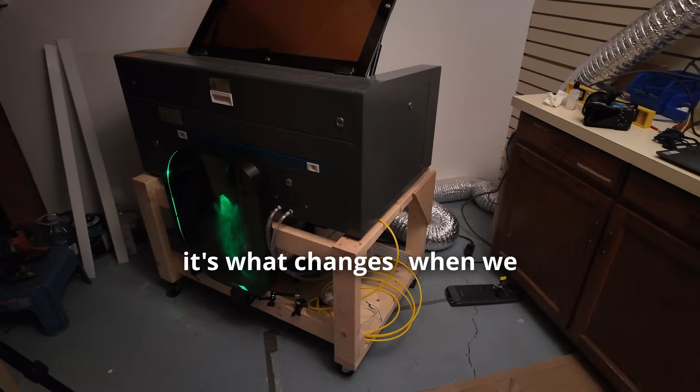All these shenanigans started when I wanted to gain back a few inches here, because this just feels like a waste of space. I wanted something that was easy to swap in and out, maintained the same performance as the existing tube, and protruded less than 2 inches from the back of the machine.

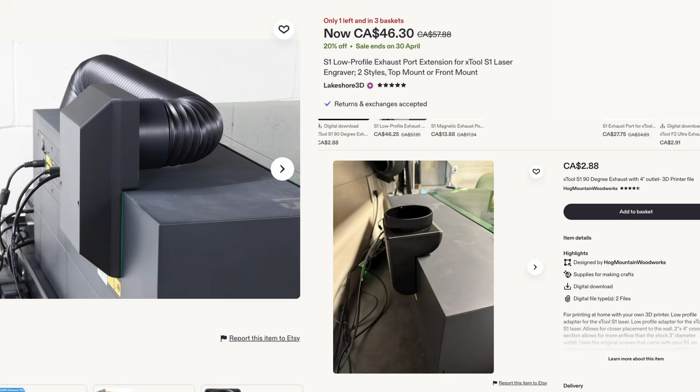There's a couple listings on Etsy for these low-profile port extensions, but they're built for a 3-inch tube. My exhaust port is 6 inches, so to maintain the airflow, I think we're going to need something a bit wider. For this experiment, let's oversimplify the problem, ignore fluid dynamics, and just assume that cross-sectional area is the only factor we care about.

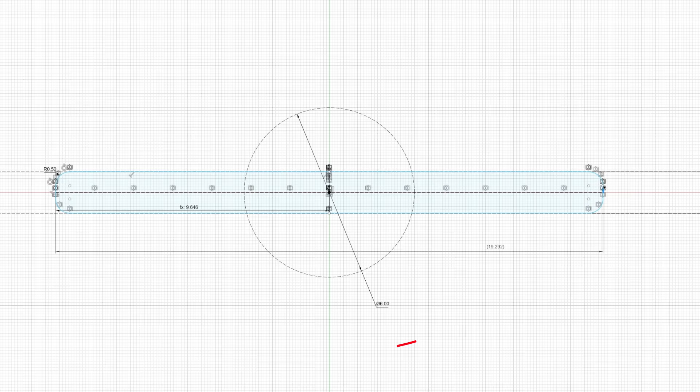For a 6-inch circle, that area is about 28 square inches. To flatten the duct down to 1.5 inches deep while maintaining that cross-sectional area, our duct needs to be around 19 inches wide. And while we model that up, there's another bottleneck that we come up against.

How do you transition from a circle to a stretched out rectangle? Clearly, one thing we can't do is directly connect the profiles, because then this cross-section is way too small. As far as I can tell, the limiting cross-section then becomes this cylindrical surface or plane.

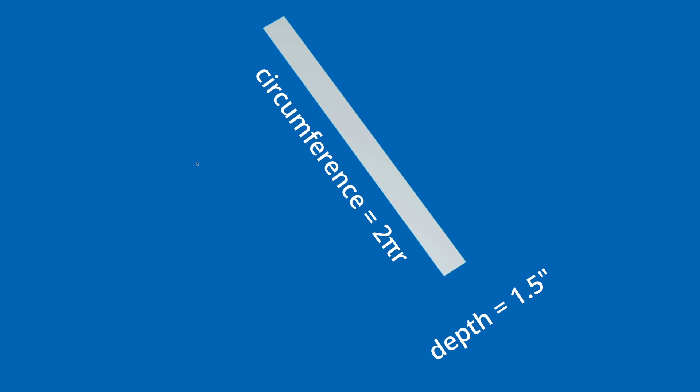And if we unwrap that, we find the surface area is just the circumference times the depth. So 6 times pi times 1.5 inches, which is right around 28 square inches. But that's not a coincidence. This is actually how I chose the depth of 1.5 inches in the first place. I knew all these variables, and then I solved for the depth.

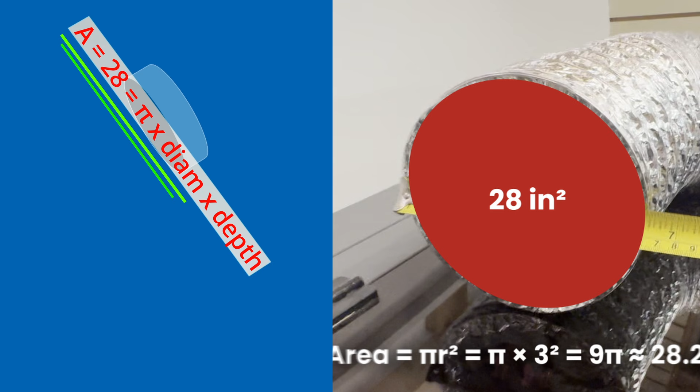To try to make sure that all this cross-section is actually used, I added extra volume all around the circular inlet port.

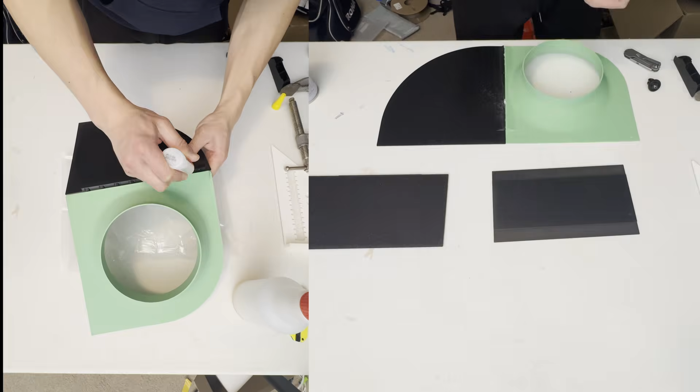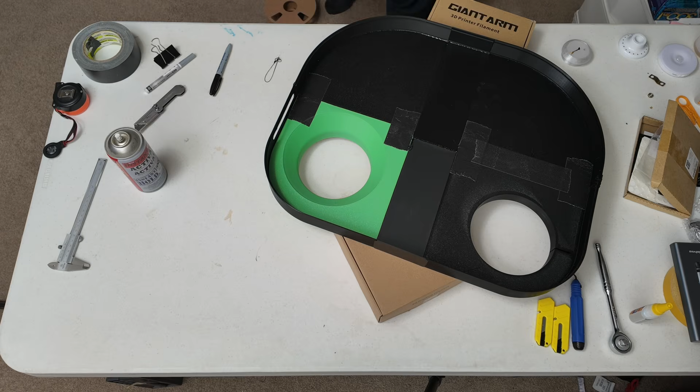It's kind of fun building these one-off ideas because I don't have to go through the thought process of making it efficient to assemble. All these pieces are held together with tape and superglue, and then the cracks are filled in with this 3D pen, which is basically a filament hot glue gun. It's just plain bad product design, but luckily this isn't a product, so it doesn't matter.

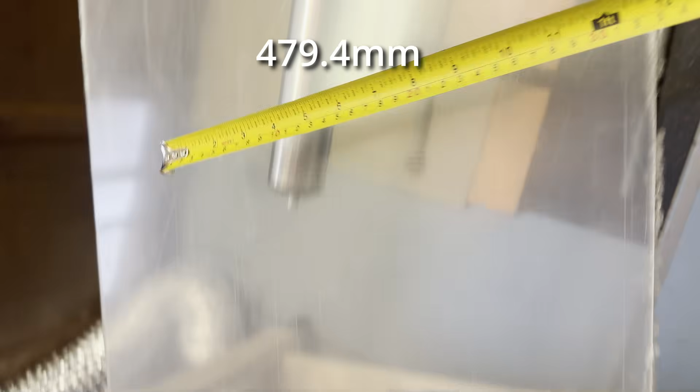So the width between these two lines here is exactly 479.4 millimeters. Then we measure this piece of plastic I got, and would you look at that? 480 millimeters. I literally have 0.6 millimeters of extra material. Here goes.

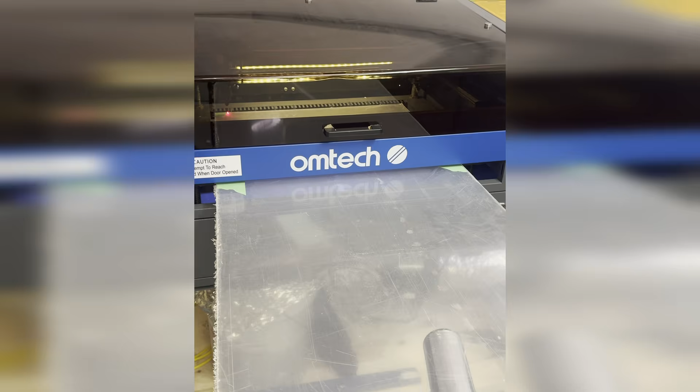Here's the alignment marker. The other one.

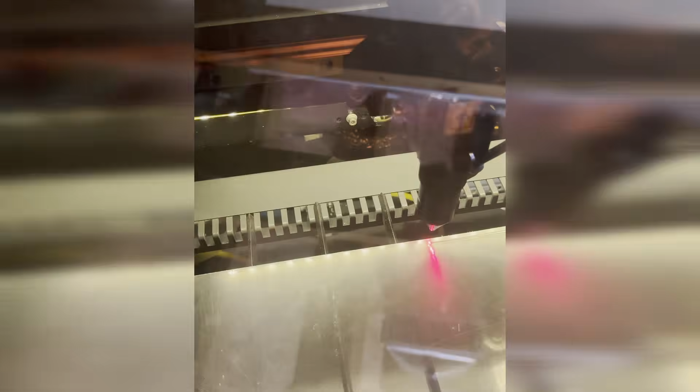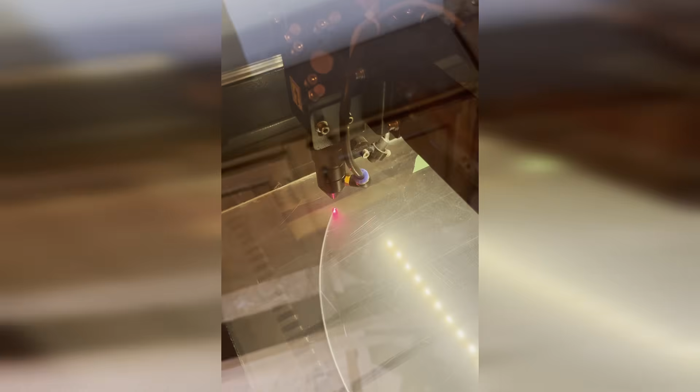There we go. That's the first part I've ever cut that's bigger than my cutting area. This is the piece I cut out, and it appears to be a couple millimeters too long.

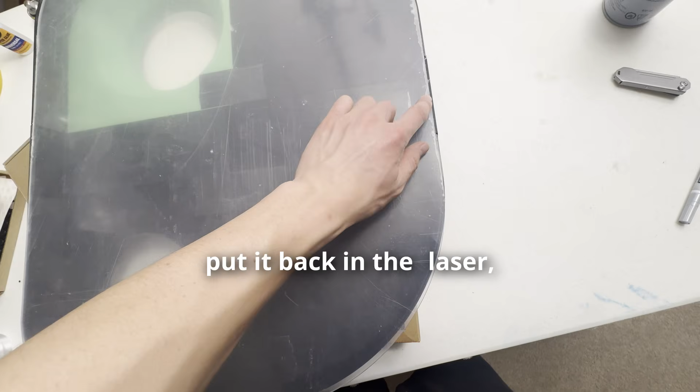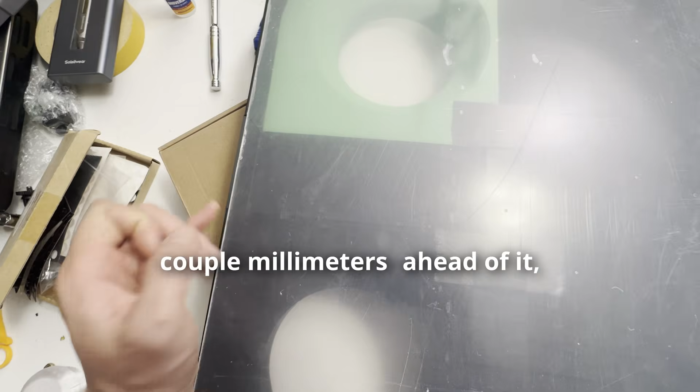I'm not quite sure where that discrepancy came from, but I'm thinking if I put it back in the laser, because I still have those registration points on both sides, if I just register to a point that's a couple millimeters ahead of it, I should be able to kind of run this cut again and shift this upwards.

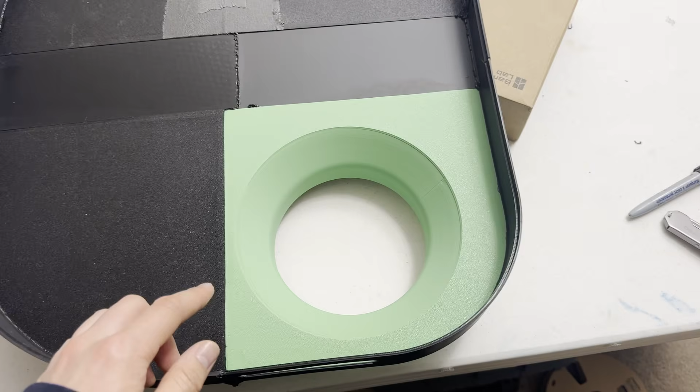It's honestly a little bit bothersome that this isn't black like the rest of it, so.

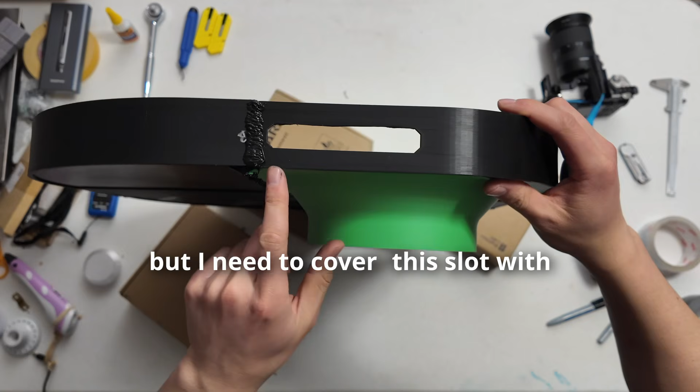Okay, so I have my plastic sheet for here, but I need to cover this slot with something clear so that the air can't pass through. Found this piece of plastic that's perfect size that I could cut out a piece, but that felt a little overkill, so I just went with packaging tape.

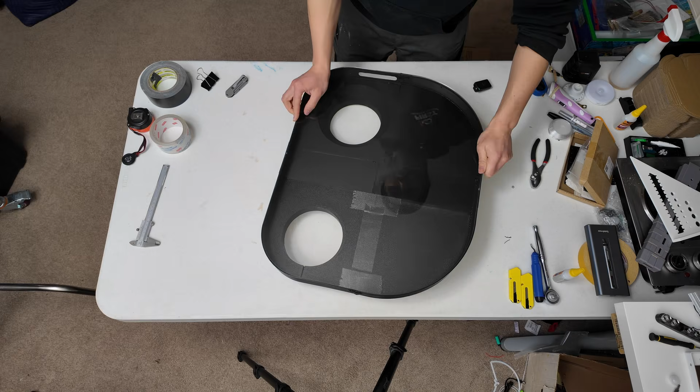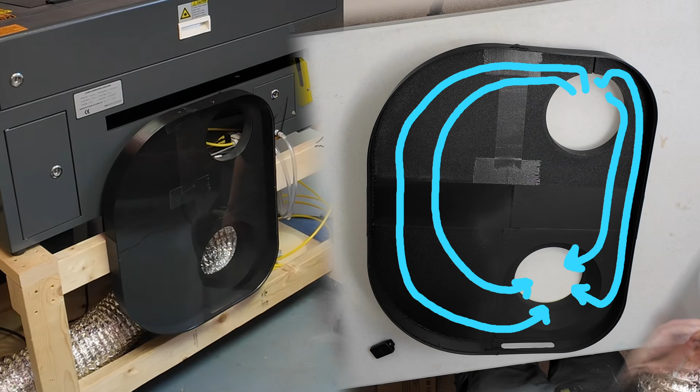Now to try to answer the big question, does adding all this extra duct space actually help the performance? Will some of the air actually come up through this space here and then somehow circle its way down to the outlet? To visualize the answer, I pointed my laser level through the window in the bottom and juiced up my little fog machine.

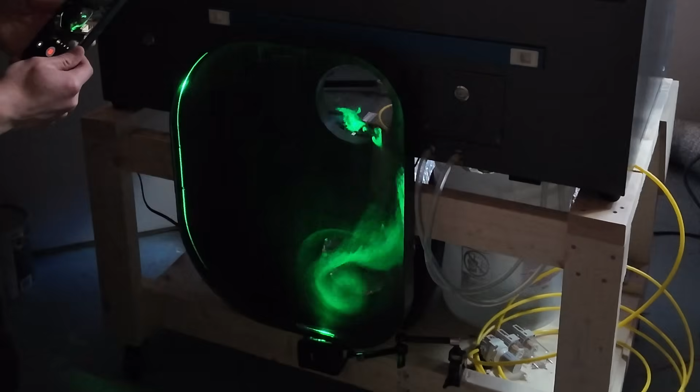I was initially a little disappointed to see that most of the smoke trail is going directly from the inlet to the outlet port, without using much of the rest of the duct enclosure.

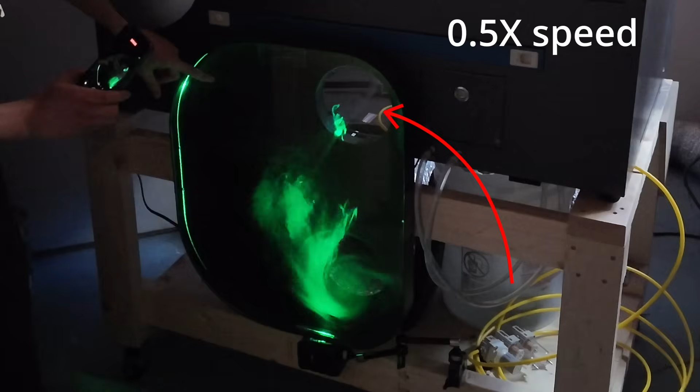But if we slow things down here, I bet you can see the mistake I made. Because I had the fog machine pointed directly at the exhaust port, and because the lid was open, the fog was only actually representing a small portion of the total airflow.

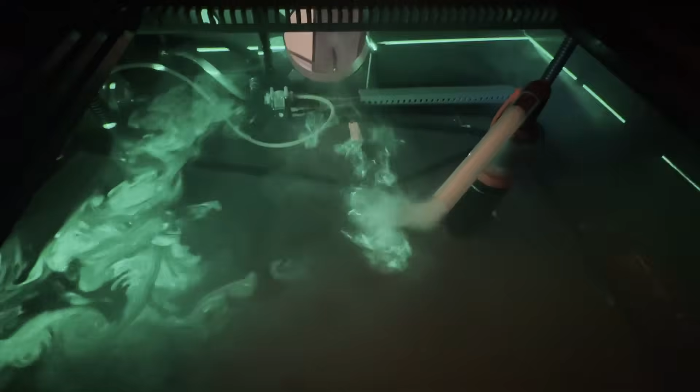If I point the fog machine this way, and then close the lid, the fog better disperses into the enclosure, which allows us to see this.

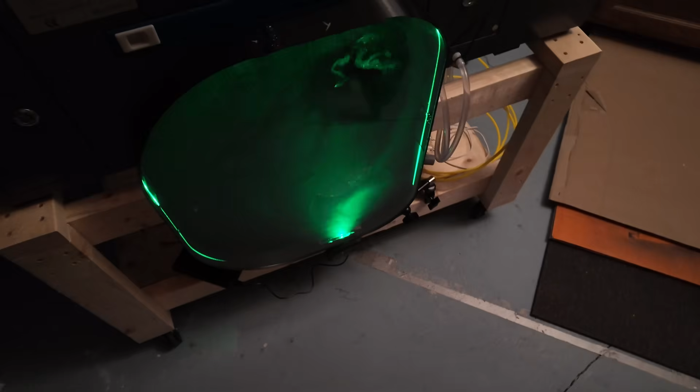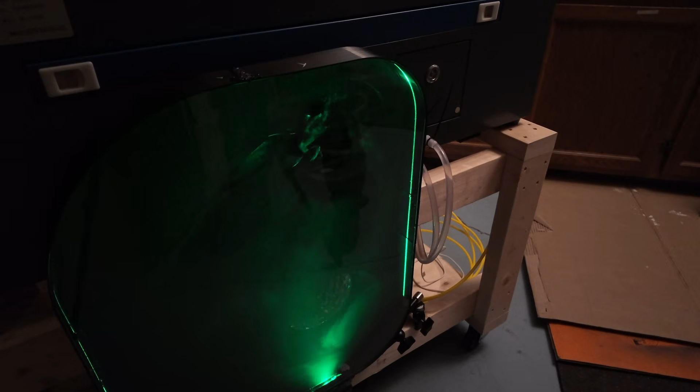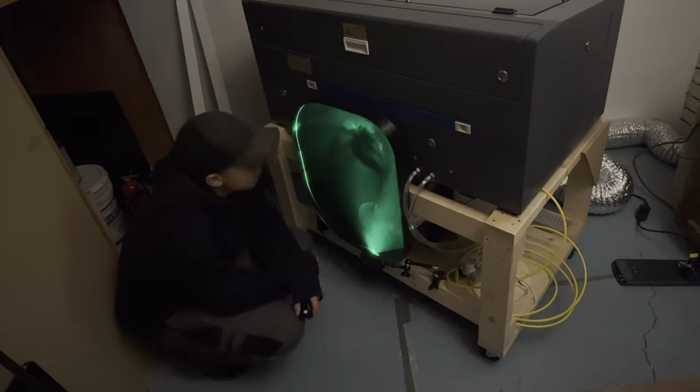I think it's really cool to see the transitioning between turbulent and almost laminar-like flow. It kind of reminds me of watching a campfire. Honestly, I could watch this for hours if I wasn't the one paying for the fog juice.

Oh, and for the more analytical viewers, I ran some very unscientific wind speed tests, which measured a pretty significant drop-off in performance while using my flattened duct.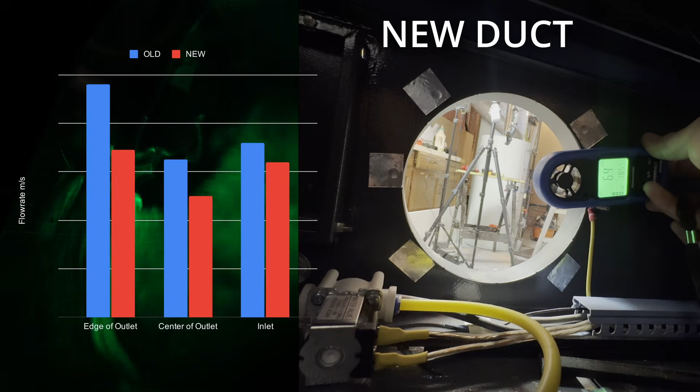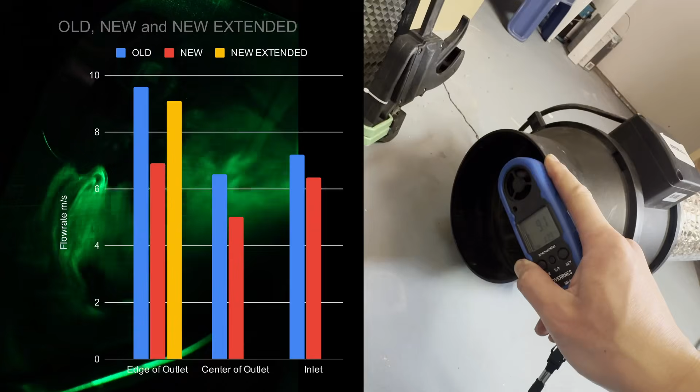But then I noticed that my control had the flexible tube fully pulled in extension, which tightens the fold in the duct material and maximizes the inner diameter. So I tried extending the tube while testing my flat duct, and that gave results that were much closer to the control numbers, which is honestly good enough for me.